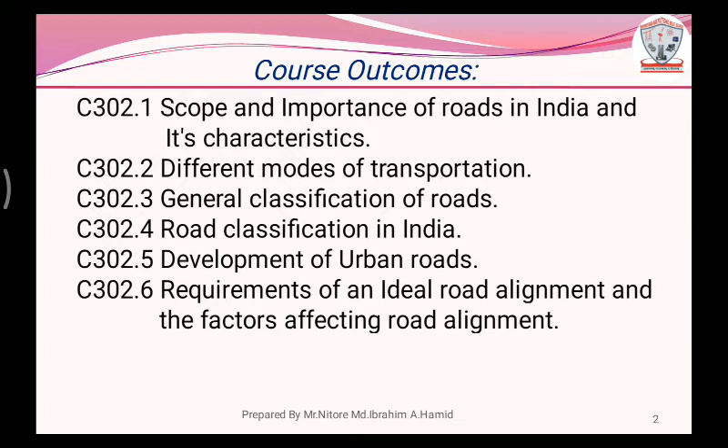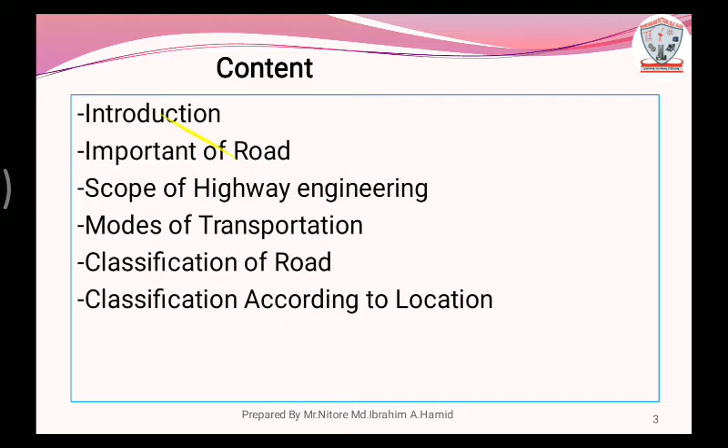In today's session, we will discuss the introduction, importance of roads, scope of highway engineering, modes of transportation, classification of roads, classification according to location, and classification according to traffic. First of all, we see the introduction.

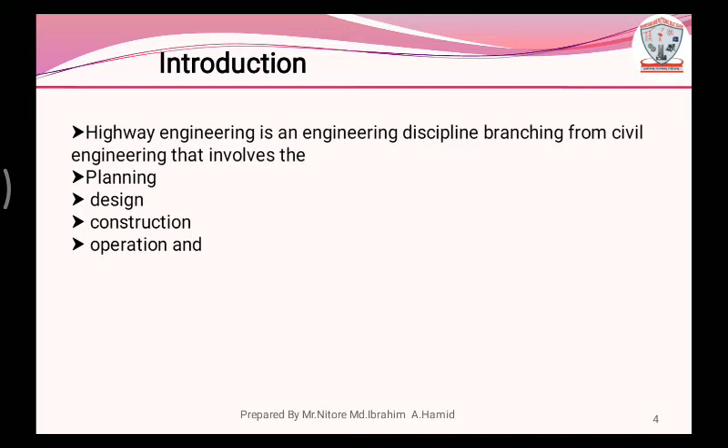Highway engineering is an engineering discipline branching from civil engineering that involves the planning, design, construction and maintenance of roads, bridges and tunnels to ensure safe and effective transportation of people and goods.

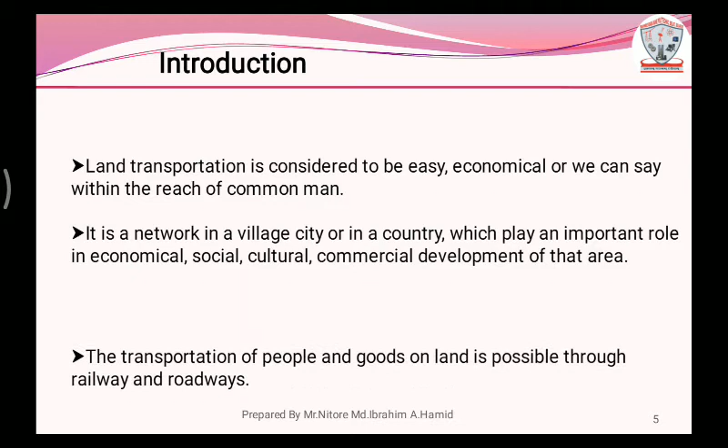In introduction, land transportation is considered to be easy, economical, or within the reach of a common man. It is a network in a village, city or country which plays an important role in the economic, social, cultural and commercial development of that area. The transportation of people and goods on land is possible through railways and roadways.

In the importance of roads, first, speedy, easy and economical transportation of raw materials, people and goods in different parts of the country. Second, it is the only means of communication in hilly areas or rural sensitive areas. Third, roads help in price stabilization of products all over the country. Fourth, it studies the traffic volume to determine the best strategy to minimize traffic congestion.

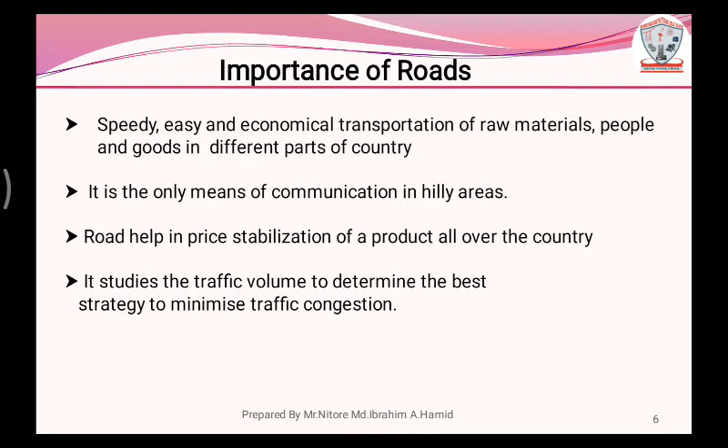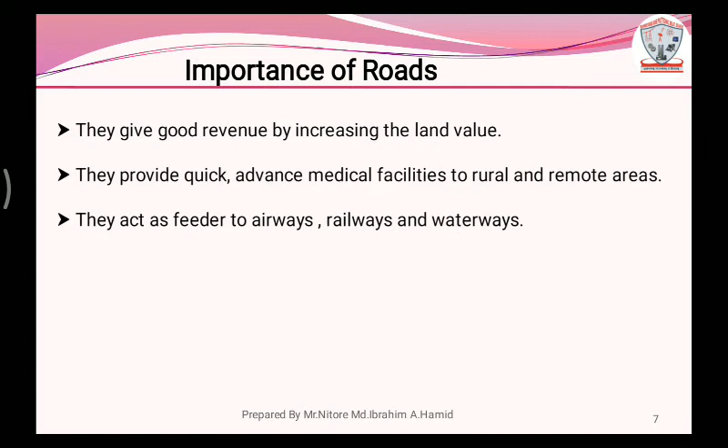They provide employment opportunities. They give good revenue by increasing the land value, and they provide quick, advance medical facilities to rural and remote sensitive areas. They act as a feeder to airways, railways and waterways. They play an important role in the defense of the country during war.

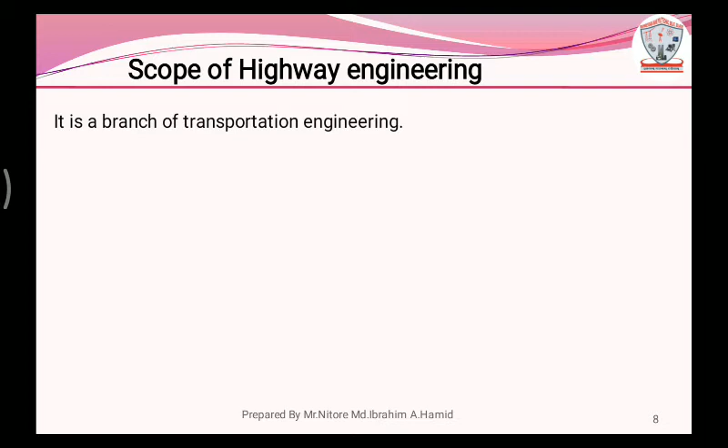Now we will see the scope of highway engineering. It is a branch of transportation engineering which includes design, construction and maintenance of different types of roads, development, planning and location of roads, traffic management study and its performance, drainage of roads, and environmental and social impact point of view.

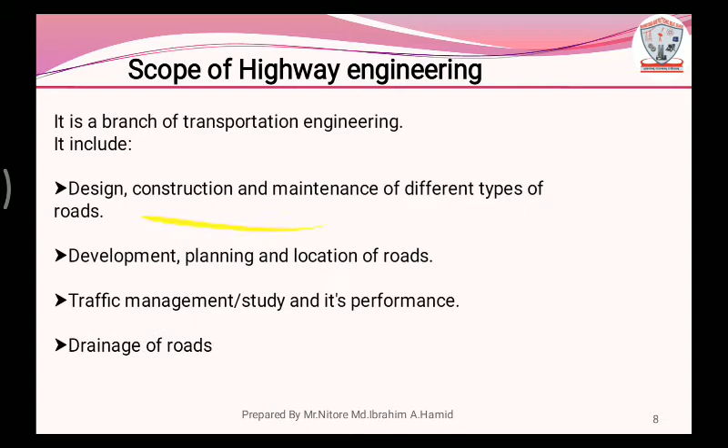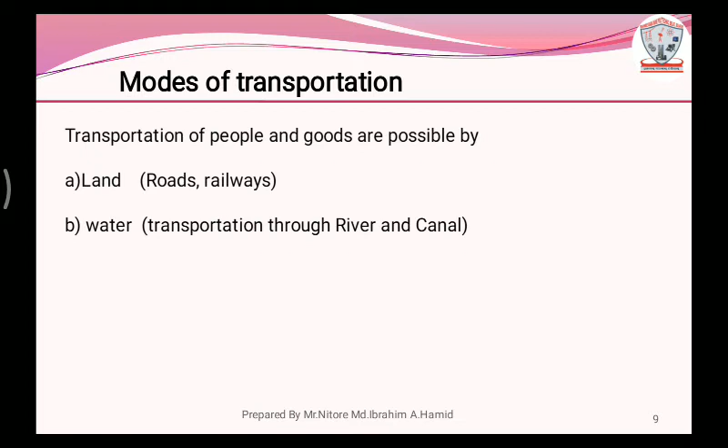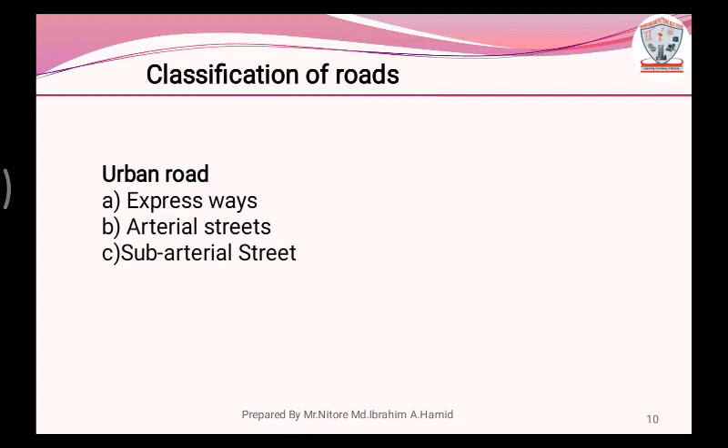In the modes of transportation, transportation of people and goods is possible by land, that is roadways or railways, by waterways, that is through rivers and canals, and by air. Roads are classified into two groups, that is urban and non-urban. Urban roads are expressways, arterial streets, subarterial streets, collector streets, and local streets.

First of all, we see the expressway. Expressways are divided arterial highways for motor traffic, generally provided with grade separation at intersections. The main function of an expressway is to provide for movement of heavy traffic at high speed. In point B, arterial streets. Arterial streets are primarily meant for through traffic, usually on a continuous route. Arterial streets along with expressways serve as the principal network for through traffic flow.

Subarterial streets, that is point C, are streets of somewhat lower level of mobility than arterial streets. These are spaced at 0.5 km in the central business area and 3 to 5 km in suburban areas. Collector streets, that is point D, are intended for collecting and distributing the traffic to and from the local streets and also for providing access to arterial streets.

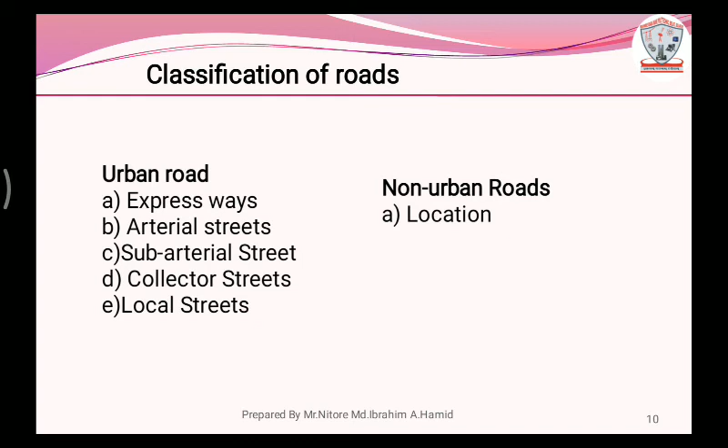The last point is local streets. Local streets are primarily intended for access to residences, businesses or other abutting properties. These streets do not carry a large volume of traffic. Non-urban roads are classified as follows: according to location, according to importance of road, according to traffic, and according to tonnage. Now we will see the classification according to location.

Classification according to location: national highway, denoted by NH. National highways run throughout the country, joining state capitals, ports and foreign highways. For example, NH3 Mumbai Agra Road or NH50 Pune Nasik Road. State highway, denoted by SH, joins district headquarters and important cities within the state, or connects them to national highways or highways of neighboring states.

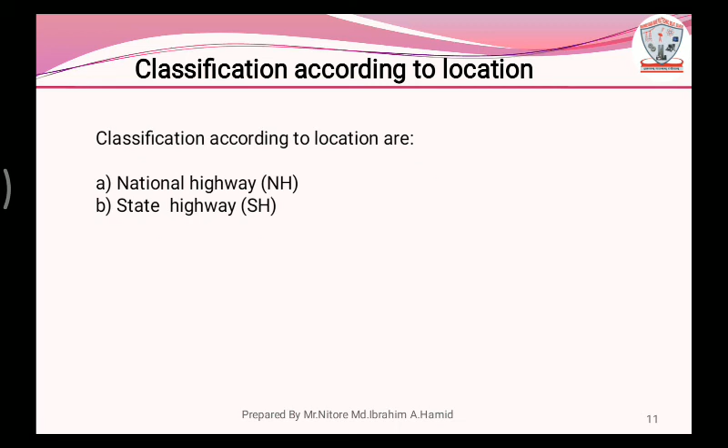Major district roads, denoted by MDR, are important roads within districts joining the state highway. Other district roads, denoted by ODR, are roads in important rural areas connecting marketplaces or railway stations. Village roads, denoted by VR, connect villages or groups of villages to district roads or with each other. These roads play an important role from the economic and social development point of view.

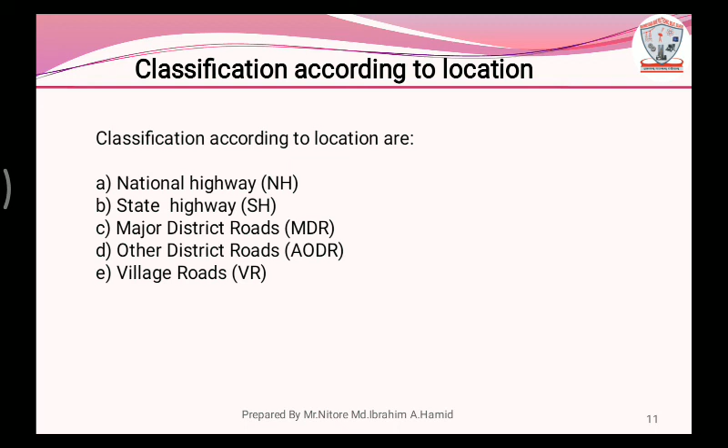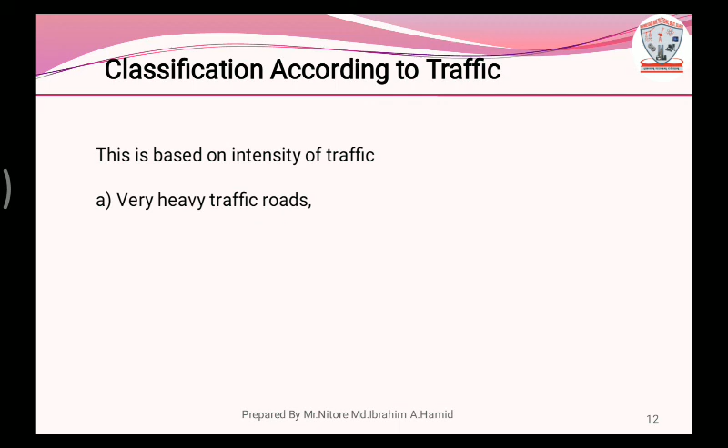Classification according to traffic is based on intensity of traffic, or number of vehicles carried per day. Roads are classified as very heavy traffic roads, medium traffic roads, and light traffic roads. The limit varies from 70 vehicles per day to 1600 vehicles per day. So thank you for watching.